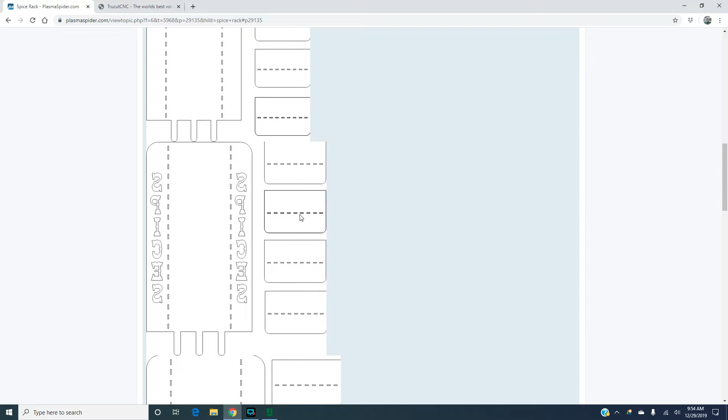I'm going to just cut one of these shelves and make sure it fits in there good. If not, I'll resize it and make it work. I can probably come up with better ideas on how I want it once I start getting involved in it. My mind isn't the type that can see things in advance - I have to be hands-on with it and make changes.

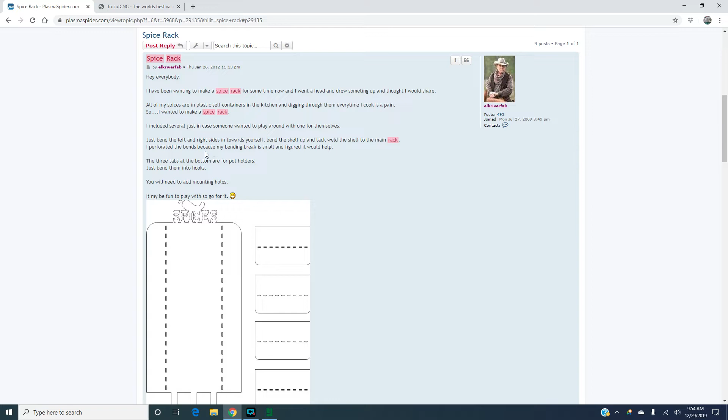Anyway, that's not what I was going to talk about right now. I'm just showing you, any of you plasma cutting people, especially in the TruCut CNC family, I like to share as much as I can with you. If you're learning like me, or even if you know less than me, hopefully I can help you.

I don't do a lot of this work. I'm not full-time, this is a hobby for me. I do plasma cutting full-time at a big manufacturing place, so this is my way of getting my mind off of that stuff.

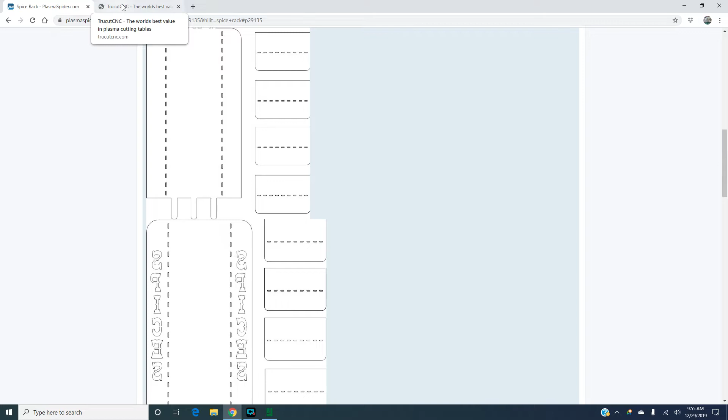So anyway, here's some little spice rack things I found. I've also seen people asking questions on the TruCut group and Facebook a lot, and it says here on Ross and Cindy's website at TruCut that this website may only be here for another month or so. I don't know where all this information will end up once it's down. That's kind of scary because I like to refer to this sometimes.

I've saved most of these. If you go into downloads, there's a whole bunch of manuals which you probably already have on your drive. If not, you need to go through here and download anything you think might be useful.

There was something about the CPC adapter yesterday. This isn't really the CPC adapter, so I'm not sure, but this is also in the manual. I've noticed that I had... maybe it's

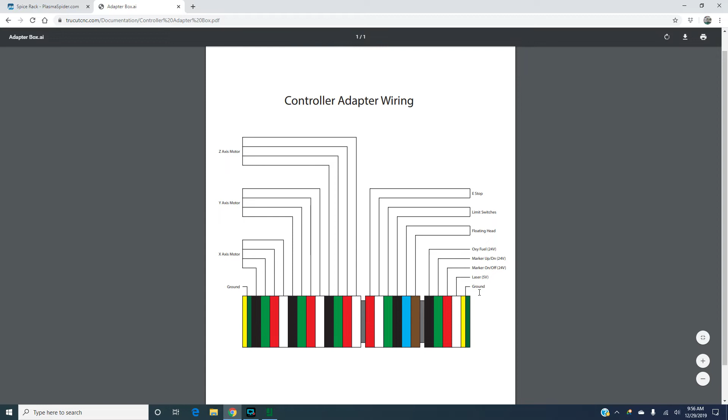talking about my PDF version or whatever I have, but it looks like this is talking about your X, Y and Z - not really clear, I assume these are color codes that are on the controller. I don't see the CPC stuff on here, which I believe is the cord that goes to your plasma cutter. But I think that stuff is in my book, or you can go on Hypertherm's website and find a little info about that.

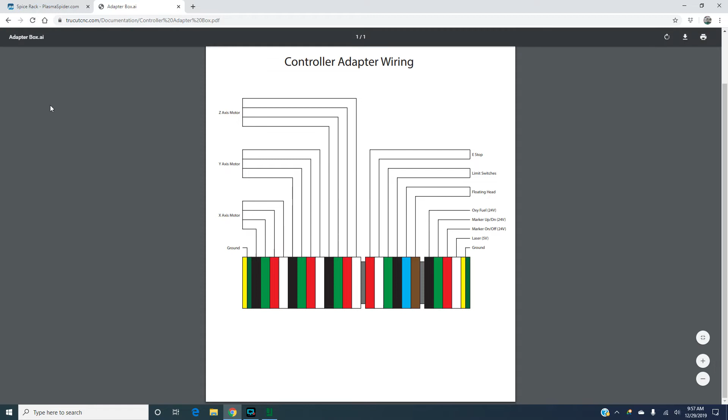It's always been nice, I could ask Ross any questions like that, and he could just tell you right quick. He's really sharp on it.

But anyway, that's just one example. I'm just telling you, go through here and get some of these hints and stuff, and download anything you can over here before it disappears. There's cut charts - that's the quickest way you can get your cut charts if you want to go into cut charts for Hypertherm.

I don't know, but this is what I use, 45XP. If you're at the computer and don't have your book in the shop, you can take a look at this. This is your shield and all that stuff. A lot of people struggle with some of that, so just look in your book - there it is, clear as day.

A lot of people want to talk about different shields for different cuts, but I'm telling you, the 220817 is your main shield for shielded stuff. Then if you go to fine cut, I have pretty much all these pieces, but this is the shield you want to use on fine cut.

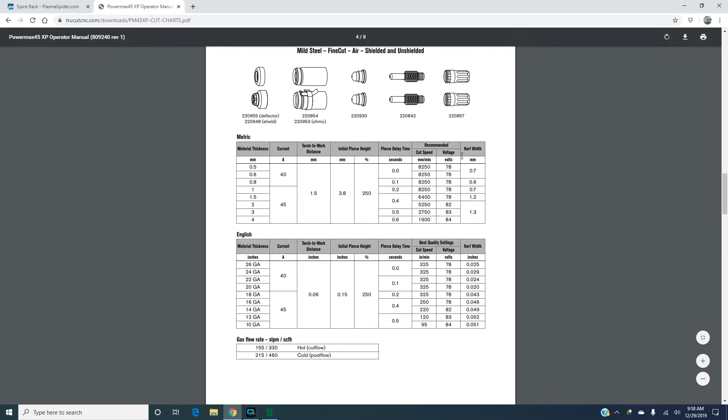I saw this debated a little bit yesterday on one of the sites - people have trouble with fine cut. Just use this one here, part number 220948. You put that with the 220930 and a 220842, and don't worry about the debate over this air diffuser thing here - I'm drawing a blank on what they call it. All that's in here, but that 220857 will work for any cutting I've ever done.

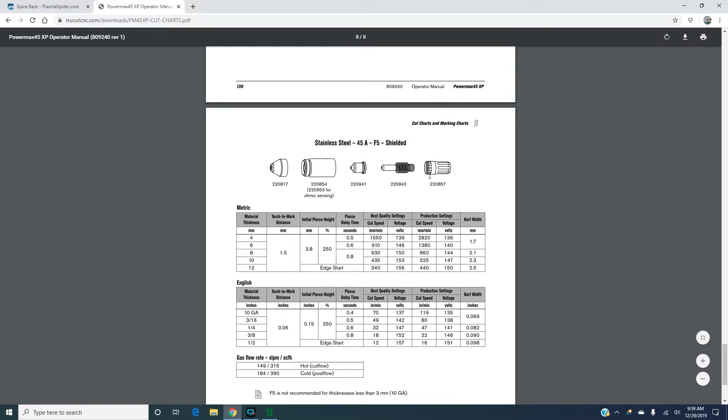I've even tried one called a 947, just tried it, and I've never seen any difference whatsoever. My book doesn't call that out. I think some of the manuals actually say to use a different one on fine cut, but that's not necessarily true. Don't worry about all that.

I don't know how I got off on this - I'm just showing you what information is available on this website. If you go up here to tutorials, Ross has the greatest videos I've ever seen on using and setting up Sheet Cam. If I were you, I would definitely have Sheet Cam. Even if your machine didn't come with it, it's very useful for what we do.

I also have Cut2D. I love it for some things, and we're going to get to Cut2D in just a minute. I want to show you something.

If you click on any of these, it goes to Ross's YouTube channel. A lot of it the sound is real low on, so just turn up your TV or whatever real loud and you can hear him. These are great videos - Ross done a good job keeping them short and to the point, not like me that rambles on.

I had computer problems the other day in my office and had to reset up some things like Sheet Cam. Y'all just click, for instance, on this side is TruCut 1960. In this video we're going to talk about setting up Sheet Cam for the first time. Now if you purchased a machine, your computer will already have Sheet Cam set up on it, but if you need to reinstall it, I just showed you - use all this stuff as long as it's here. It's very helpful, and he goes into Cut2D also.

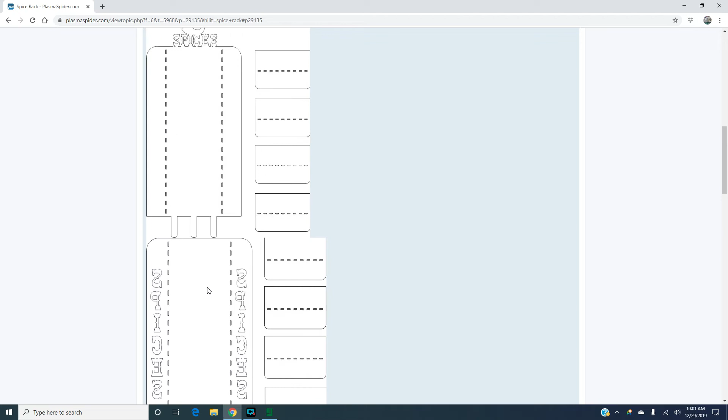So let's get out of that and get back to what I wanted to show you. These files, like I talked about before, they're not clean files. I've never seen clean files hardly ever come through from anybody you buy files from - I don't know what happens to them, honestly. Like I've said before, I've even bought files from Steve, you know, on one of the Facebook groups, and they were just as trashy as these others.

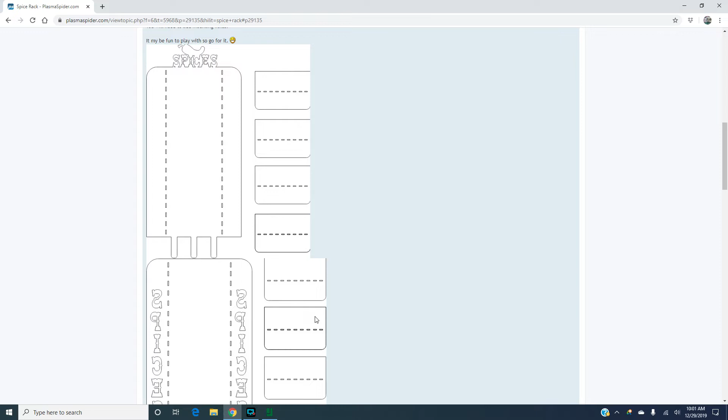I don't know what happens to them. I don't believe their problem is when they were created. I think it has to do more with when they're transferred or something happens to them. I don't know, it's beside the point. I just want to show you what to do.

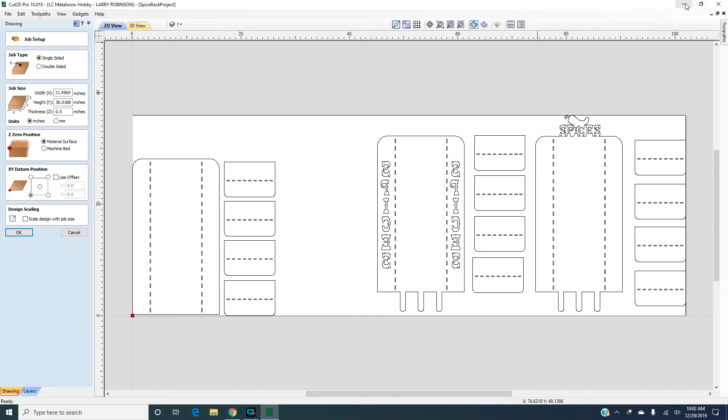Let me close this because I don't know which file I've got open right here. I've been working on these files, I just put them all on one screen here. I'm not going to save that right now.

Okay, let's go back over here. Also, Cut2D sent out an update a while back that you could go to version 10 for free, so you need to take advantage of that. I don't see a lot of difference, but they must have improved it.

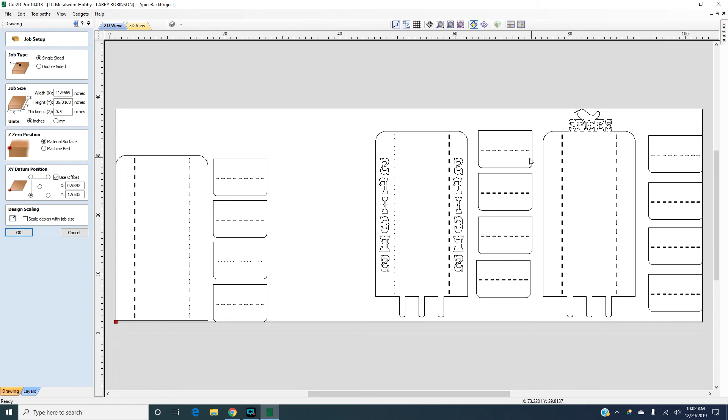So let's open this file, SpiceRack project is what I had it called. Just for instance, I'll show you the best way. The first thing I do when I get a file from somebody is mark some of this and push N for node editing mode.

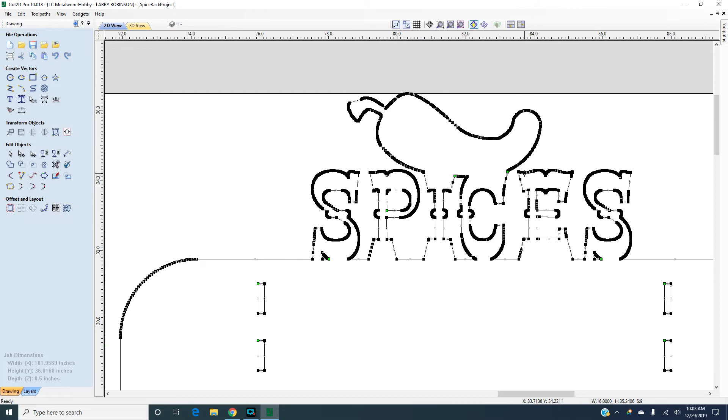Look at how trashy that file is. See all them nodes that you don't want to try to cut that. Only God knows what's going to happen if you try to cut that - I would certainly think it would just overload your machine memory trying to do that. I know at work on our big industrial machine, it'll lock up a lot of times if you have something like that.

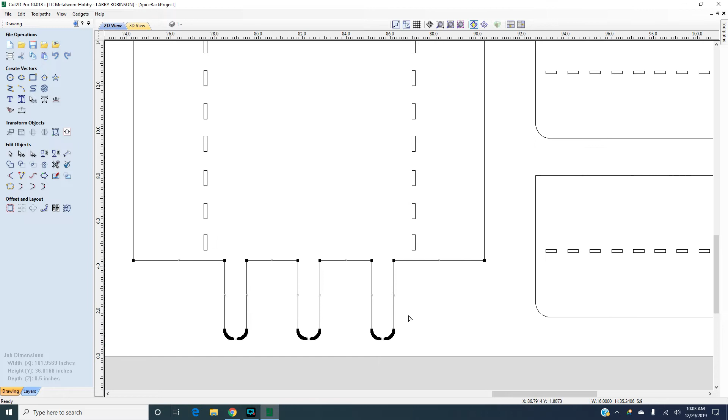So if you want to simplify that, you know Inkscape has something called simplify, you want to reduce those nodes. That's just ridiculous. So in this instance, I would just come around this whole thing, just kind of get one at a time here.

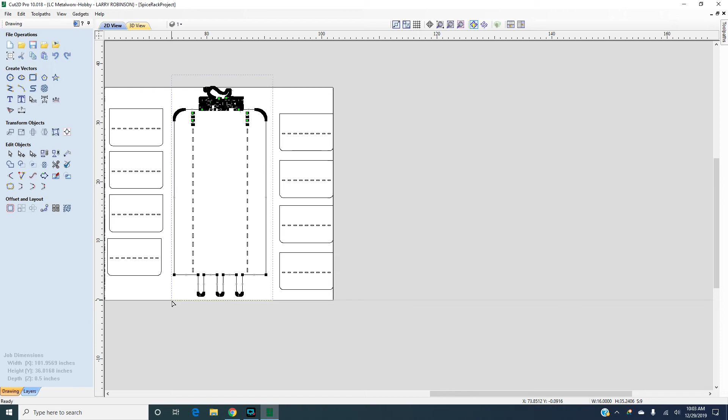Mark that whole thing like that, okay? You know, I like to get it out here so we can work on it, but we'll just leave it right here, okay?

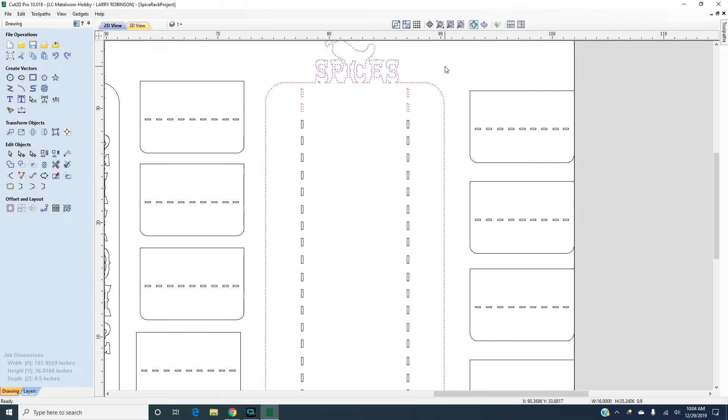Let's turn node editing off though. So it didn't mark all of those. So hold your shift key if you want to add stuff.

I'd burn it, I'm just keep on messing up in it. I get to talking on videos and I can't think straight. Okay.

Everything's marked, that we want the whole file there. Okay. Now go over here when you're marked, on this curve fit - you see where I'm pointing right here? Curve fit, it's in the edit menu.

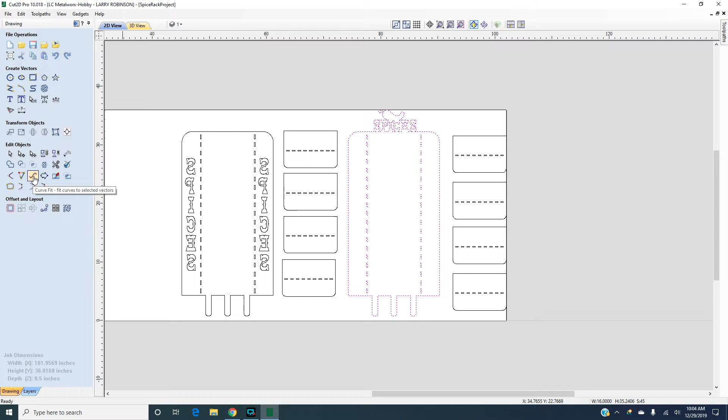Don't type, click on curve fit. Now when you get in here, look at these. This is something I was a little wrong on before - Gary Ramsey kind of told me about it a little bit, something you don't realize until you're writing that. Make sure you click this box right here, it says replace selected vectors.

If you remember on an earlier video, if you ever watched it, I was sitting there trying to figure out how to get the duplicate vectors out of that. You don't need to do that if you'll just have this clicked, replace selected vectors. I've not seen a lot of difference, but that's with this keep sharp corners, you can play with that. But on the Bezier curves deal there, that seems to work.

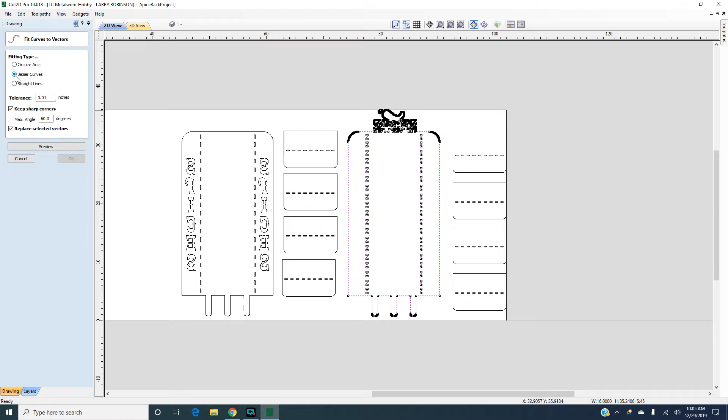So you can push preview. Okay, and see how that really reduced all them nodes now to where there's not so many of them, just crazy - like you'll see that a lot on arcs and things on everything.

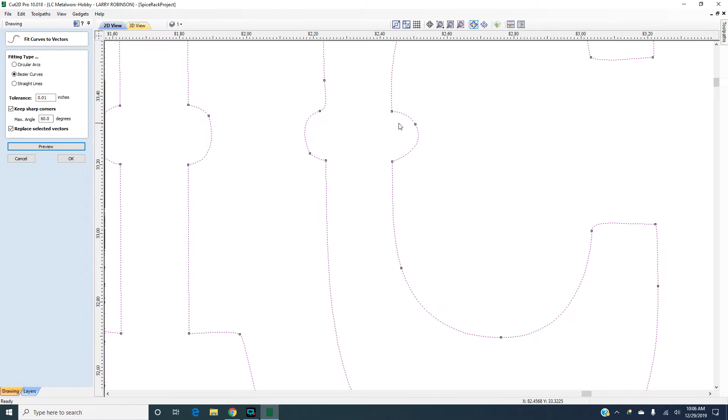So make sure everything is selected here. Everything looks pretty decent, it may deform a little bit here and there, but it's probably not enough to worry. And if you do worry about it, come back in and you can redraw or move nodes around and fix little areas if you want. But for the most part, this works pretty dang good.

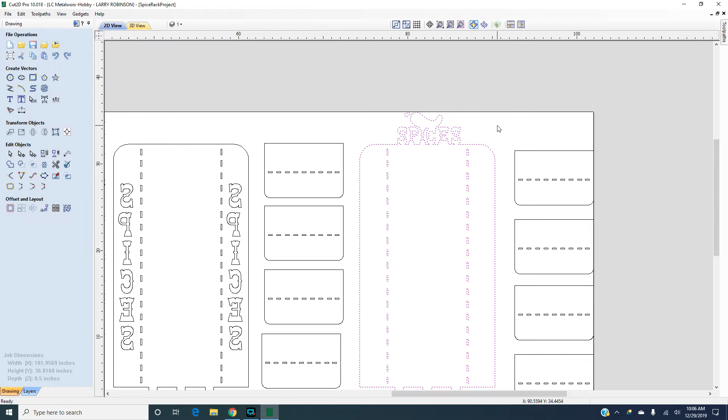I found some more errors in one of these somewhere too. But so now that we think that's going to be okay, just click OK right now. So now the tool is turned off. So let's click node editing again and look at that again - see there? Now it's really clean, much better than it was anyway.

And all of these areas, these were just stacked big time. You know, all of this was just crazy. Now that'll cut much better, but I'm not done yet. I still don't trust this.

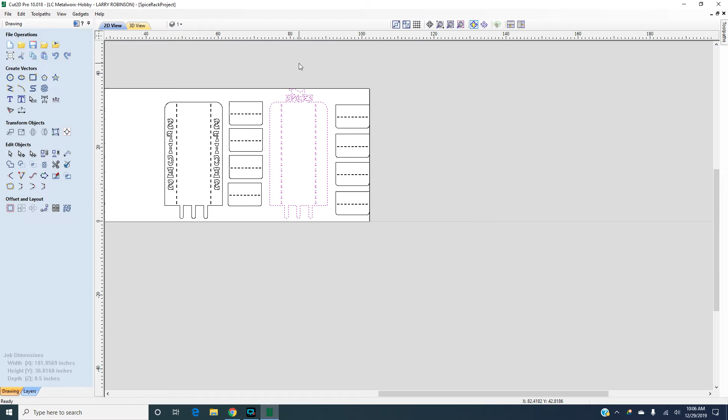What I like to do is, over here where this little check mark is, Vector Validator, I like to click on that and then have everything marked like you do and push search selected. And see there, it's finding some faults right there. It says there's 2 overlaps and 4 intersections.

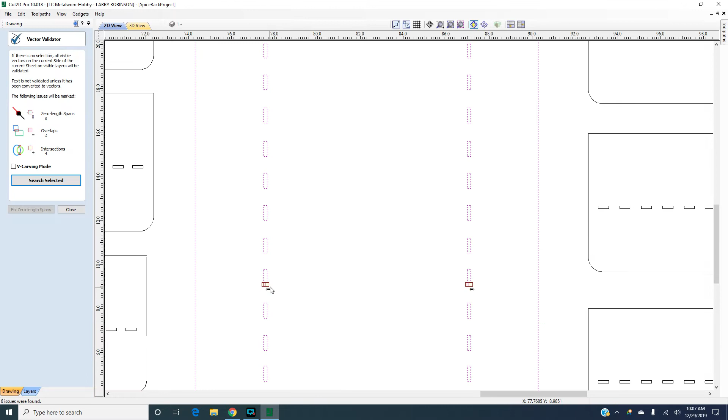So sometimes it'll let you fix some of that, but if not, you just kind of see there's an overlap line. That's a different color right there a little bit than this. So remember where you're at here. We're on the fourth little perforation up.

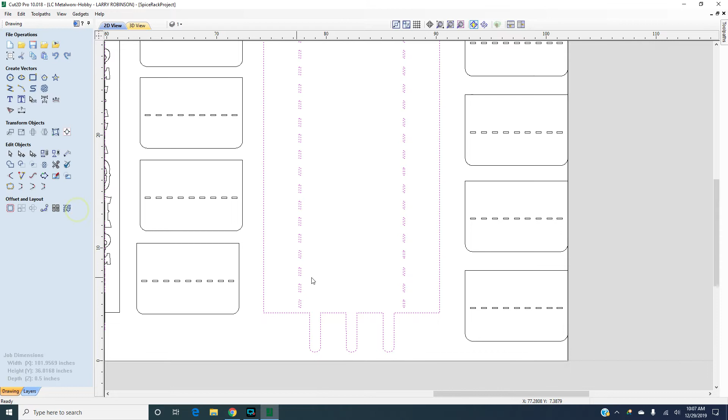So let's close that tool out and let's just unselect. Now let's go right into this. Don't mess things up where you forget where it's at. What I like to do is, don't worry about that, so you don't zoom in or out if you do something. Just have it where you want it. You can either go up and down on the arrow keys, like just go 1, 2, 3, 4.

Look at that, there's an extra line under there. So let's go 1, 2, 3, 4, put it back. Just so you'll know for sure where that was at.

Go over here to transform objects. And that first one says move selected objects. Have that center right there and on absolute. So your center, look at these numbers on the Y. Since we're going to move up on the Y, that's at 9.443.

A lot of times I'll just jot that down in a note if I'm messing with something. I'll put the X and the Y or something if I'm messing with something. We're at 9.443. All right, let's close that back out. Write that down, 9.443. Or just go 1, 2, 3, 4 clicks.

Remember, you just went 4 clicks. Don't zoom in or out, it changes stuff. So click on that line you don't like and just push the delete key and get rid of that. Then select that again and come back 1, 2, 3, 4 clicks. Now let's go back and check to be sure we're right where we are, 9.443, yeah.

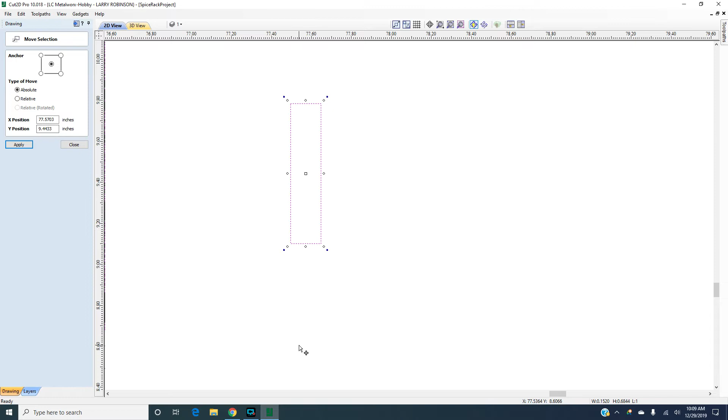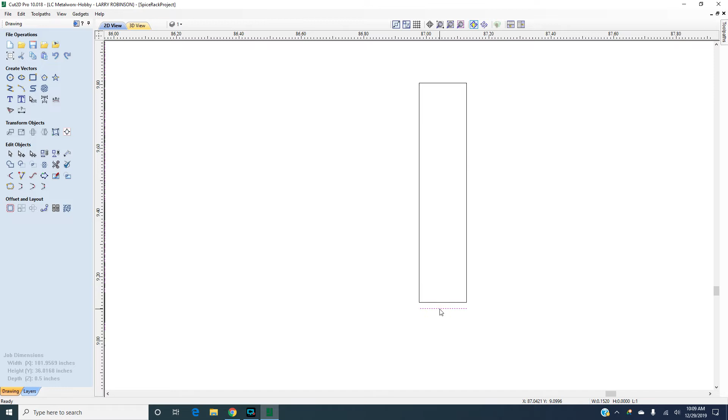Now, close that tool and get off of it. Now you can zoom back out, go over to this one. This other one had the same problem, remember? So let's zoom in on that. Select it. Do the same thing, 1, 2, 3, 4 clicks. Now I'm gonna delete that. And select this again. I'm going to come down 1, 2, 3, 4, and I know that we're there.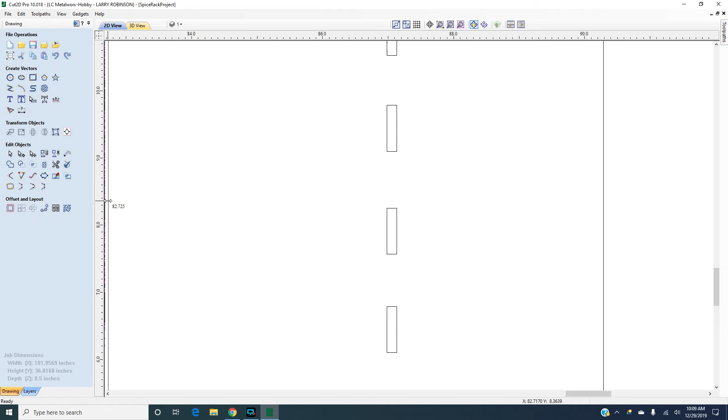You can double check, you know, if you want, and make sure you're lined up with things. You can always pull guides over here if you wanted to look at things and see if things are straight. Sometimes you want to use them guides just for different reasons, you know, they're pretty handy. You can take measurements that way and different things.

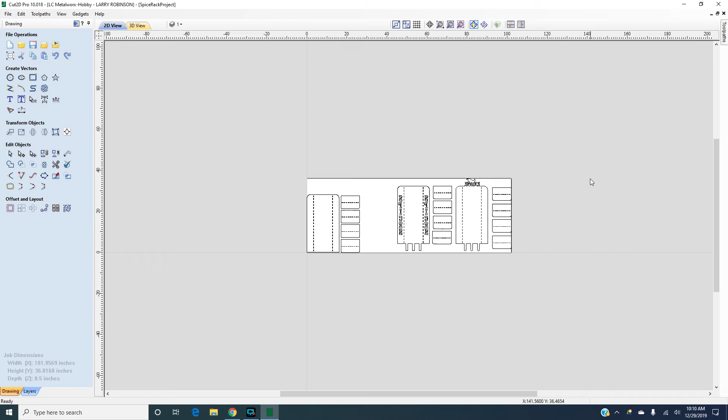Is that guide still on there? Yeah, if you want to, you can just go delete guide. Okay, get rid of that. So that one's fixed, but you know, I'm sure that all of these have issues like that.

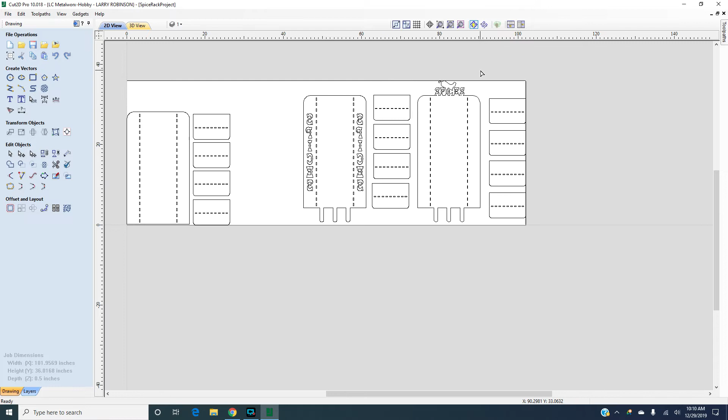Just push your node editing. Yeah, look how messed up that is. But that's how quick and easy it is to fix it. I mean, you can do it a lot faster when you're not talking about it and making videos and all that silly stuff. But so the next thing I do, and I've already done this, I'll just show you.

I've got all this laid out on the screen because I just pulled all them vectors in and so I could just play with them on this one screen. But you know, normally you'd go up here to File, Export, DXF, or SVG, whichever. If you're going to be going to Inkscape with something, you want to save that as an SVG probably because it works. If you use a DXF in Inkscape, you get some crazy stuff going on. So, but I use DXF files primarily unless I'm going to be doing that.

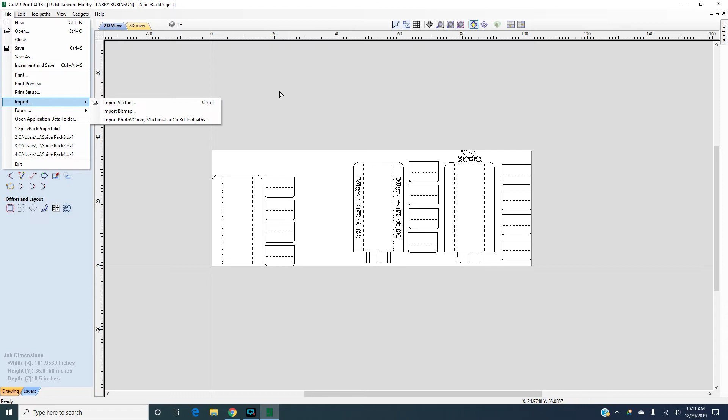But see, we don't want to save all of this in one file because, you know, we're not going to cut all that like that. So what you can do is just mark what you want to save, just like this. And we still got node editing on that. So now, there's what we want to save. We don't want to save all of this in that file. So then you're going to go File, Export, DXF, save it where you want to, name it what you want to, and save it. Okay.

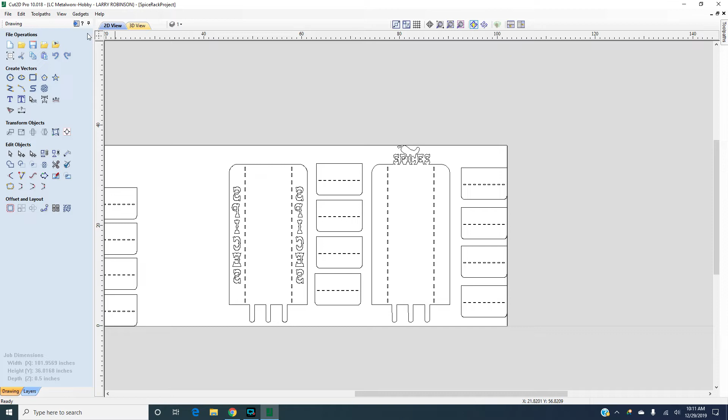I think I already saved that. So the next thing I would do, to me, that's a real handy tool. And if for no other reason to have Cut2D, the CAD program works so great. I don't really use the CAM portion of this hardly ever because it's just not as useful as SheetCam.

It will work, I'm not saying it won't. I have used it, and it does have nesting features that are helpful sometimes, but let's not go into that right now.

So the way I go to the table with a cut, I'm not out there right now, I'm in the office here, but I have SheetCam in here on this computer too.

In SheetCam, you just go File. I'm not that great on this stuff, I'm just showing you things that I've learned. Import drawing, and then I go and find my drawing. Try to save things in the same place so you can find them. I've recently had computer problems, so some of my files are a little harder to find than they used to be, but I usually save things in DXF.

And this has to be selected as DXF or SVG, whatever type you're looking for here. Guess you can search right here, maybe. Spice. Oh, I didn't click in here yet.

If you click on DXF, you should be able, normally you can go right to Spice, Spice Rack Back 1, I think is what I named that one piece that I did.

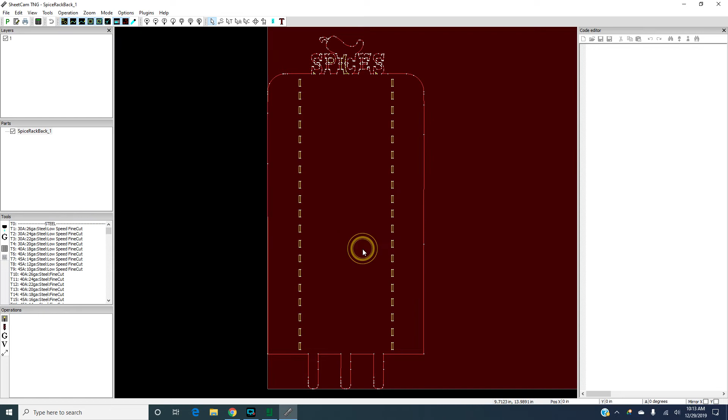Make sure this is an inch and it's on this lower left corner. You can see sometimes that's on metric, you can get really squirrely here. You can play with some of that if you want, but for the most part I don't trust it all the time. I still like to measure things.

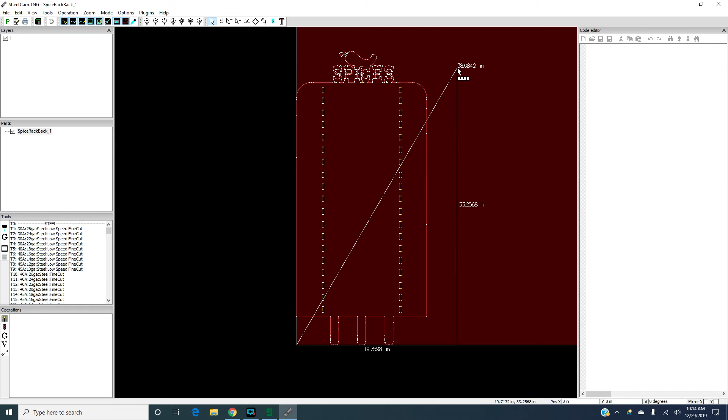You can right click the screen here and go to measure and just go down here in this lower left corner. I'm just looking for approximate measurements, and you can say yeah, that is roughly 33 inches tall by 20 inches wide. Anyway, so you can just right click out of that.

And a lot of times SheetCam will show some kind of errors if there are any also, but we know there's not any, we just looked at all that. Well, that's how you go to SheetCam with it.

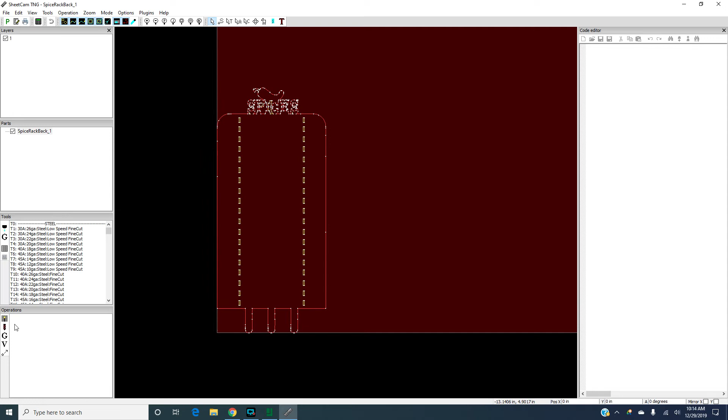And I hate to go into this because this is not really what the video is about, but if you don't know, here's your layer. You can check, move layers around if you want, change things around. These are tiny little, I don't even know how small these are. I would want to measure those.

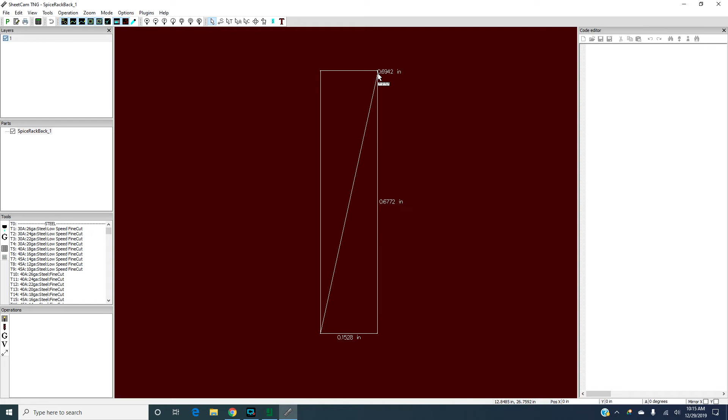A lot of times when I want to see, think about if I need to, see that thing's 677 thousandths tall by only 152 thousandths wide. So we're talking an eighth of an inch wide by about 5/8 of an inch tall. Those are pretty tiny, but they're just there for perforations.

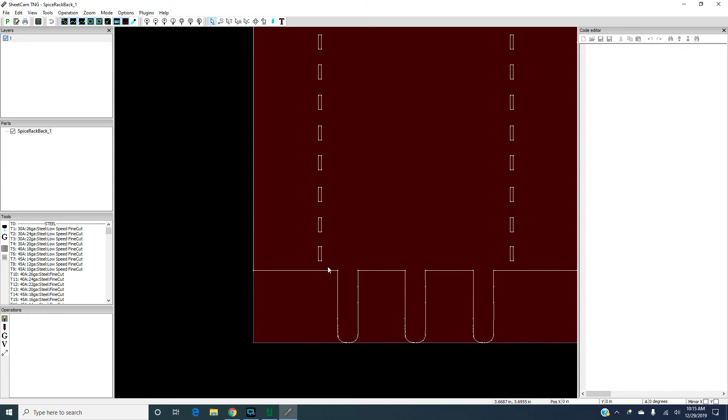It's probably not important to worry about it. If you wanted, you could move all of those to a different layer, and I might do that, I don't know. Probably won't, just because that's not a feature that matters. It's just going to be something where you bend your metal there, I guess. This will be done.

Okay, I'll show you if you want right quick. On operation, click down here on this little, as Ross calls it, little match head looking deal. You can leave this on outside offset, it'll pick it, but click your layer. There's only one layer showing here.

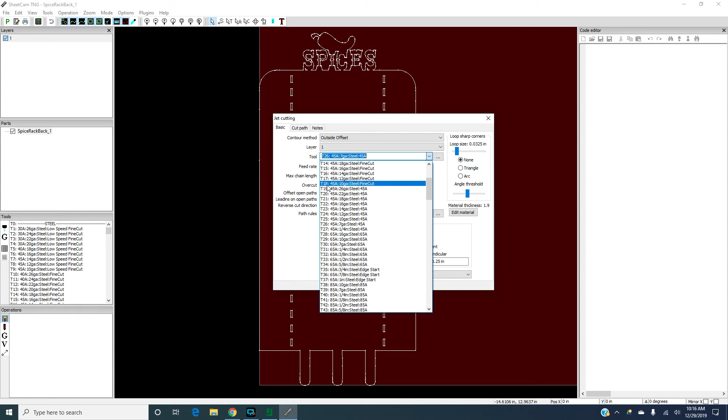Make sure your tool is set, and it's not, because I was cutting 3/16 last. It usually stays on whatever you used last. I think tool 16 is going to be fine cut, 14 gauge. That's what I like to use.

Feed rate is showing it's going to be about 200 inches per minute, but out on Mach 4, you can turn it down to 70% or whatever to run a little slower if you want. You can run it fast if you want. I think that's going to be a little fast. I run about 150 to 160 inches a minute usually on there. And it's kind of hard to say what type of lead-in we want to use on this.

Tangents work good on sharp corners, but they're not very good on other stuff, so you can kind of get by with arcs a lot of times, but we need a small arc because we have some small features, so I don't know how small, but let's just say 0.1.

Maybe leave our lead out about the same. We'll just look at that. It's really all you got to change here. If something's goofy here, you don't want some of that set. Make sure you're on reverse cut direction right here - that's for climb milling, that's what we want.

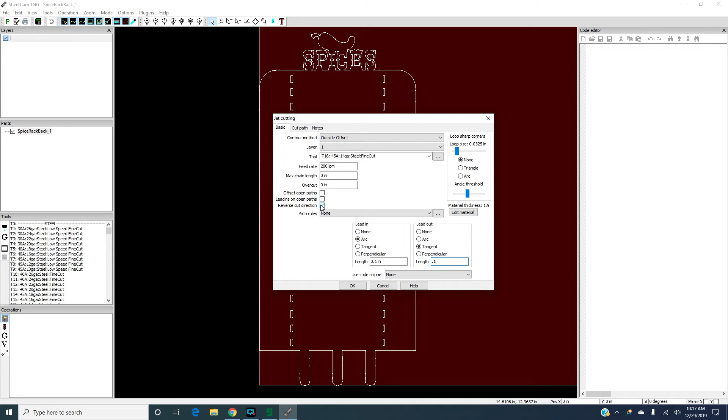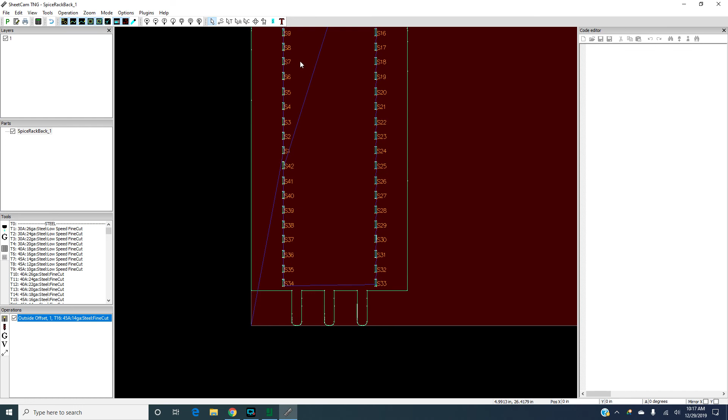So let's just say okay, and that's going to show you pretty much what it's going to do. And we can zoom in and see where's the first pierce. Looks like it went up here, but it's not. Where's the first pierce? Should be an S1. Here he is, right there.

And those ain't gonna cut that great, but it'll work for these perforations. You can move those if you wanted to a little bit, but I'm not gonna be worried about this too much on those because they're just little perforations. Where I'd be a little more concerned is up in here on the letters.

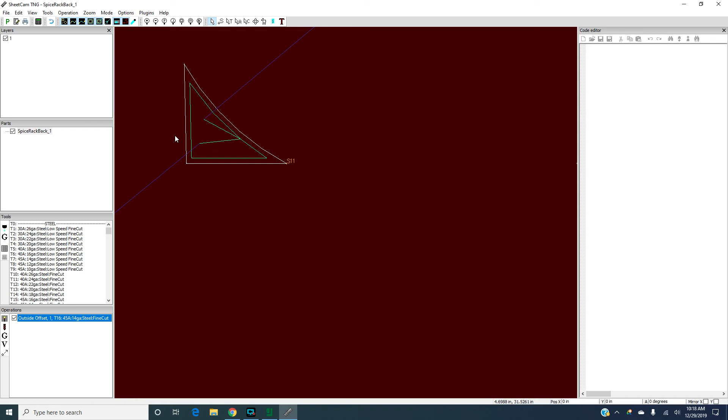That kind of changed the lead there. It's not an arc, I've never really seen it do that. It's more of a tangent or something. But again, I'm not going to worry a whole lot here, that looks like that'll cut. I kind of like that way because that kind of made that smooth.

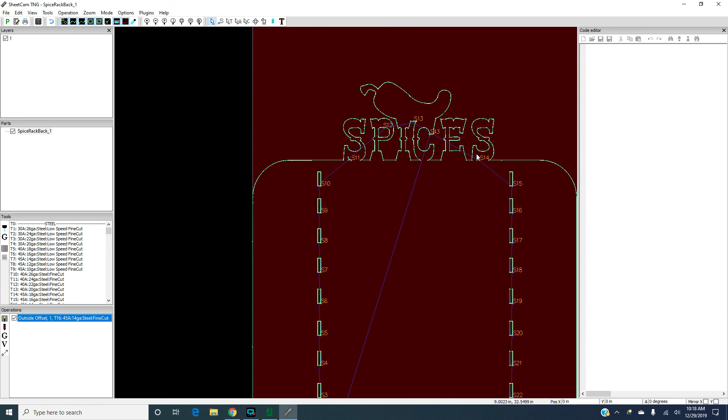Anyway, I don't know why I'm getting off on the SheetCam here. That's not what I was here to show you. But if you want, I could just go cut that, and that's what I plan to do. Anyway, I wanted to just go cut this.

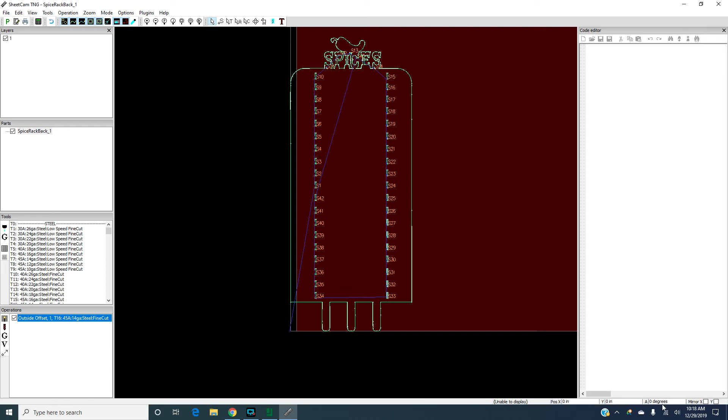Oh crap, if you mess with stuff like I just did, you gotta go back and it's kind of hard to figure out what to do when you mess stuff up like that. Forgot how you do that. I think it's on degrees. I really don't know.

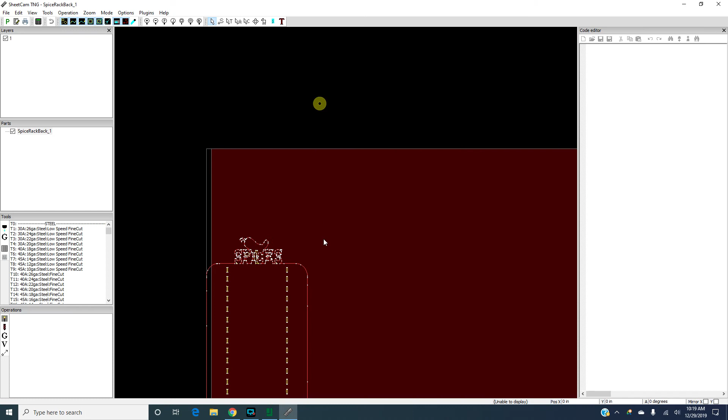Anyway, I'm not going to put an operation on this right now. I'm just showing you how you bring it in and do that. And let's just close SheetCam and do not save your changes.

Mainly just showing you how useful Cut2D is on some things. I've been trying to learn Fusion 360 here lately, and it's been eating me alive. To be honest with you, I can't figure it out very well.

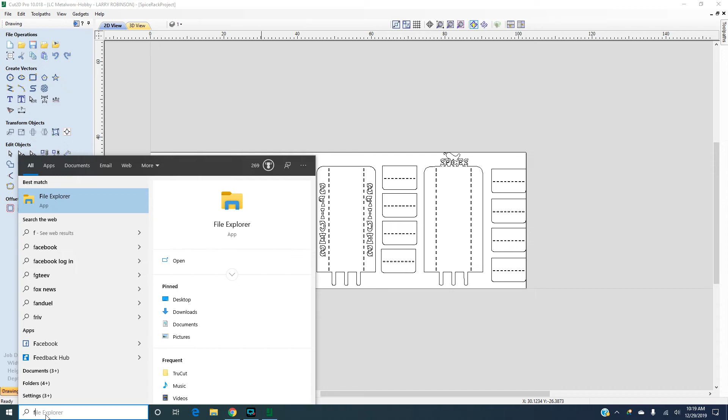Let's see if I can pull it up and show you what I mean just real quick, like hopefully. It's a pretty advanced program, so it'll probably take a minute to load that up.

But I'm learning some new Haas machines at work, so I'm trying to learn how to do this in case I can do some cam with this. But I haven't really figured this out very much, I tell you. My son helped me, he's a CAD guy, he uses AutoCAD and Inventor some.

I guess you push File, and you can go Open, and I think it was called Shaft_Project - that's what I was working on. And I tell you, I haven't done very well on this. I'll show you the shaft I've been drawing.

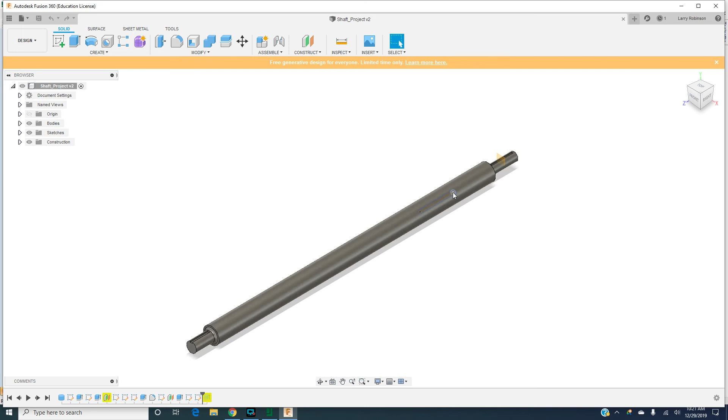See, I've got a plane right there that I don't know what's going on with. But you see the shaft. I was trying to draw a keyway there, and I don't know how to make that work out either. But the neat thing about this is you can kind of roll this around and look at it and stuff. I'm not very good at doing this either.

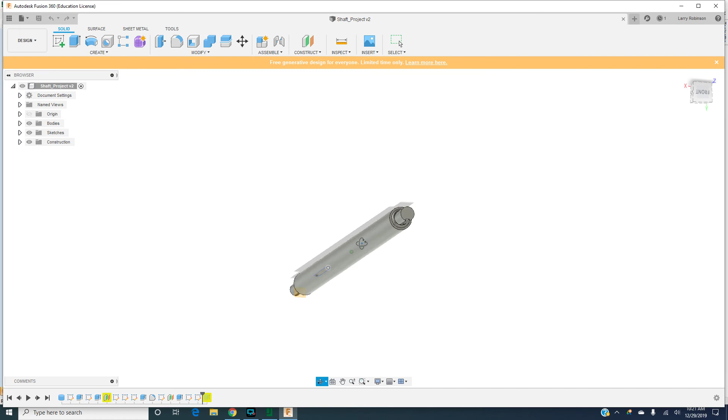Just for instance, I can roll this around a little bit if I knew what I was doing here. I really thought there was a way to roll that. See there, I ain't worth the flip on this.

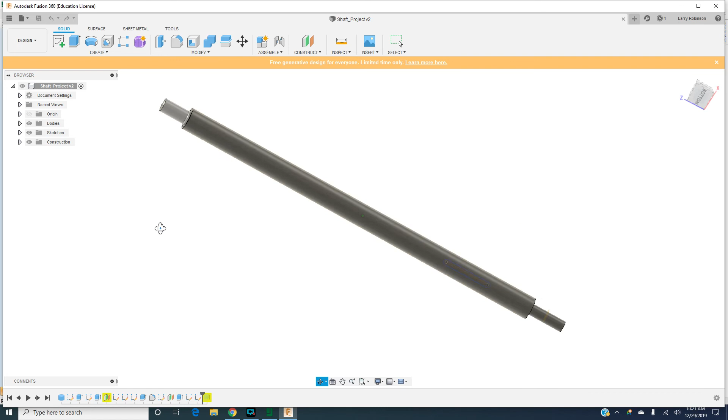What I wanted to look at is that, see, I put a radius right there on that. Maybe you can see that better. The mouse is backwards on this, I haven't figured out how to change that.

You can kind of see I've got a keyway here, I need to make that a radius there where your end mill works. But anyway, this is kind of a useful program, I know, I just don't know much about using it. I drew all of this the other night, it took me a long time. There's got to be a faster way of doing this.

But I've got a long way to learn. I've been watching videos that Gary Coote told me about. Lars Christensen is part of Autodesk, I think he's an Autodesk employee, but he has a lot of videos. His stuff, even though it says for beginners, is way more advanced than what I need.

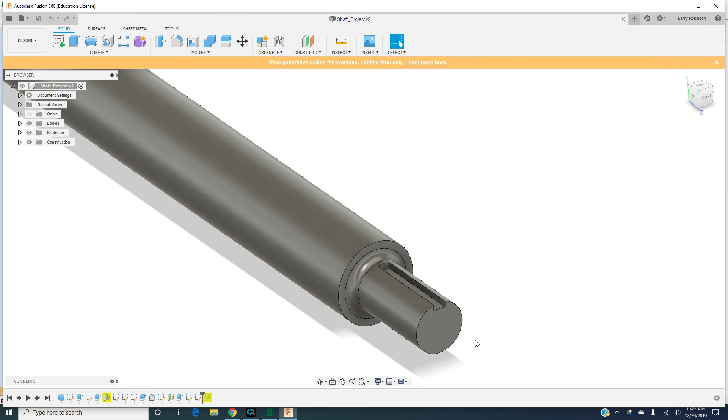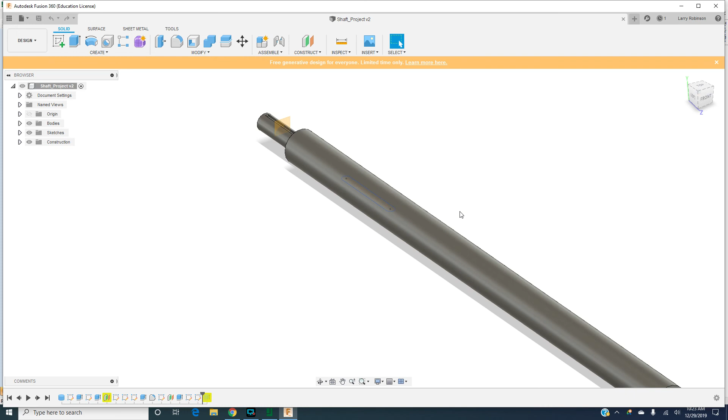I need to know how you move features around, or sketches that I've made, kind of like that one right there for instance. I need to move that to a spot on the shaft where it goes, and I don't see anything here that lets you move things to a certain X and Y coordinate, like we do on Cut2D, where you just lay things exactly how you want them.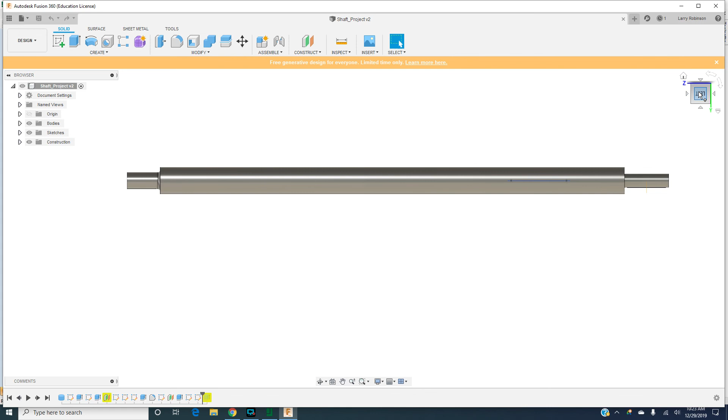I really don't know anything about that, at all. I can see it's pretty useful, I just don't know much about how to use it. Like that plane that's still stuck out here, I don't know.

I wish I could find somebody that could talk to me and help me through some of this, locally here or something, that could sit in with me for just a minute and let me show them what I'm trying to do and help me a little bit.

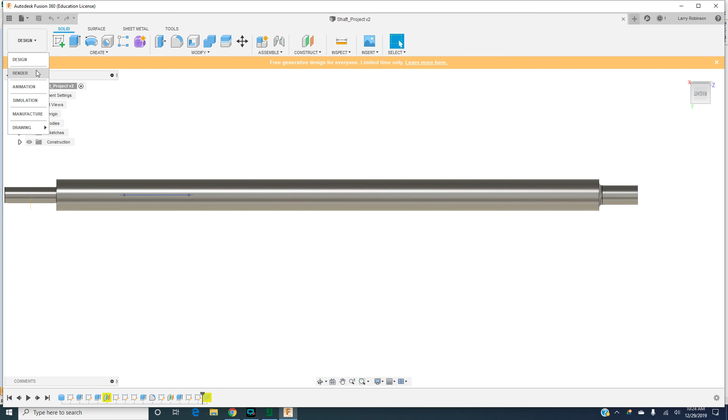I'm probably in the wrong deal. I'm in design, or I know you can go to, here's drawing, and I don't know. What you do on manufacture, I think, is where you go into the CAM features or something. Yeah, I don't know anything about this stuff. I was just showing you anyway. I'll close this out, I was just showing you.

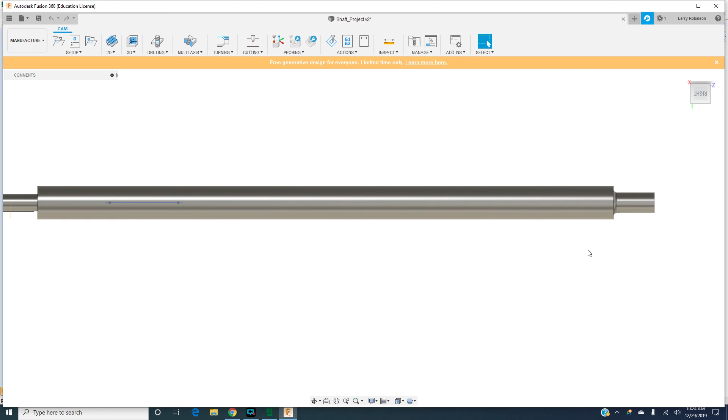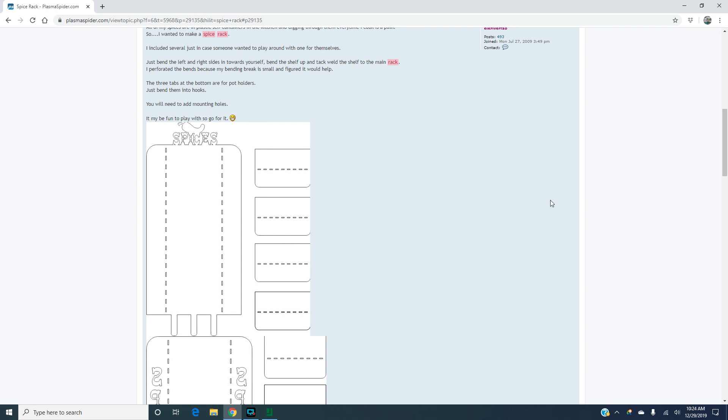I've been working on that a little bit here lately. But anyway, go use that website that Ross has, like I showed you on PlasmaSpider, and make sure you have all that. There's a lot of useful information there, and I really wish there's some way that website can stay up. I know it probably costs him money to keep it, so there's no reason for him to keep it there when he's not in business anymore.

But I don't know, maybe Gary Ramsey knows the answer for that. He's kind of taking care of a lot of that stuff on our Facebook group.

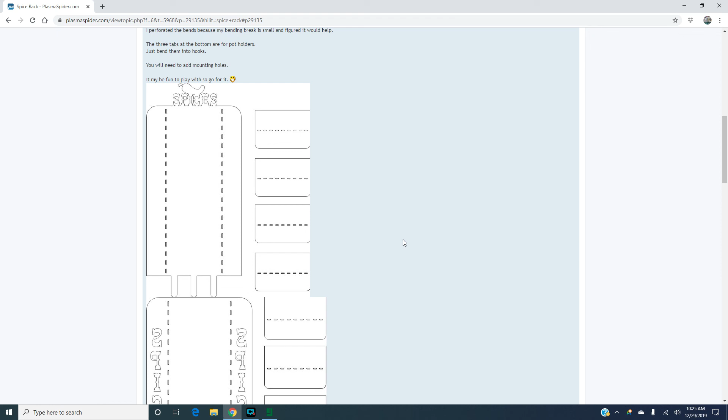Anyway, sorry for the long video. I just wanted to show you those quick little tips that I'm kind of learning a little more about as I use it with Cut2D, and there's a whole lot more features. If you watch all of Ross's videos, I promise you'll get to knowing a lot more, and there's tips and things on other YouTube videos about these things.

This is a really useful program, it's the best CAD program I've ever seen. Not that I'm that experienced with CAD, but I'm talking about for things we do with plasma cutting. I don't believe there's anything better than this Cut2D for doing that. And like I've said, and Gary Ramsey's definitely said, Inkscape is still useful. I don't abandon it, it's still useful for doing tracing and a few tools like that.

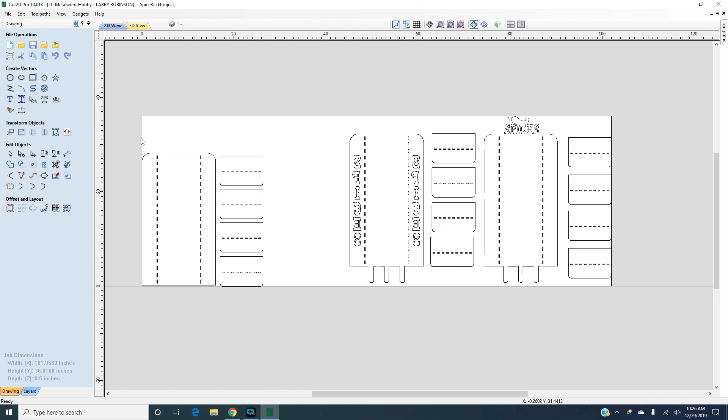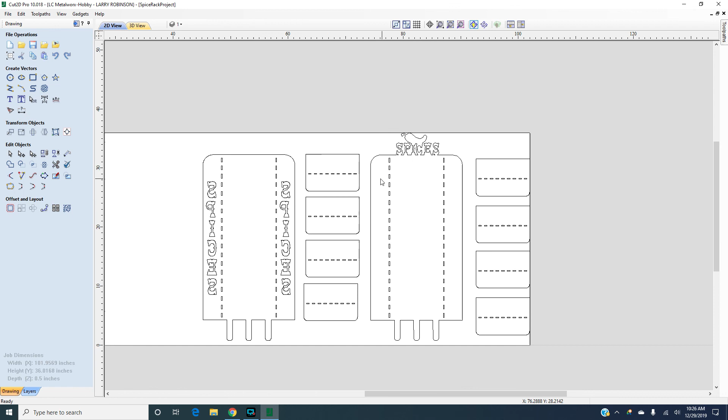To me it's pretty goofy though, because you don't have a trim feature like you do with the scissors here. You could just, this is joined, so you can't really trim like that. But anyway, this trim feature is amazing on this. And BobCAD kind of has some of that too. BobCAD is probably not that bad of a program if I could learn to use it.